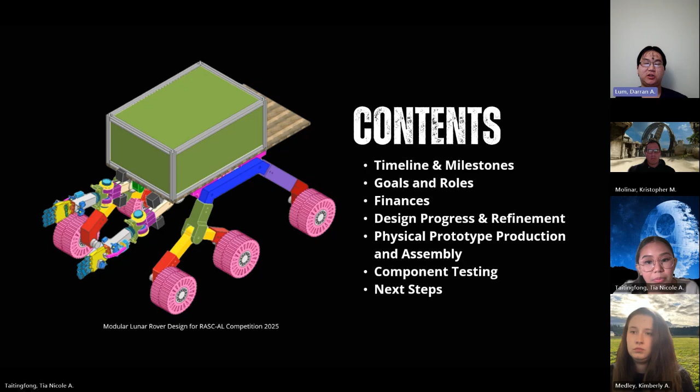For our timeline, we have a little bit of adjustment since we did not receive our EAB reviews by the first day of the semester. We were unable to refine the design between January 13 and 31. So the actual timeline shows that we started on January 15th, and it just pushed a few days until spring break, and then we maintained the same schedule throughout the second half of the semester as planned.

Our current milestones include starting the production of the prototype, which we have completed, submitting our RASC-AL proposal, doing our team check-in, and here we are at March 8th for review and feedback from the midterm report. Following that, we'll have 60%, 80%, and 100% completion between March 10 and April 8th.

For our goals, we'd like to design a collaborative and semi-autonomous lunar rover to maintain systems and resources on the moon. Additionally, we'd like to create a modular and scalable design that can be adapted throughout time with changing mission requirements. And if time allows, we'd like to implement machine learning to develop decision-making algorithms and enhance its autonomous capabilities.

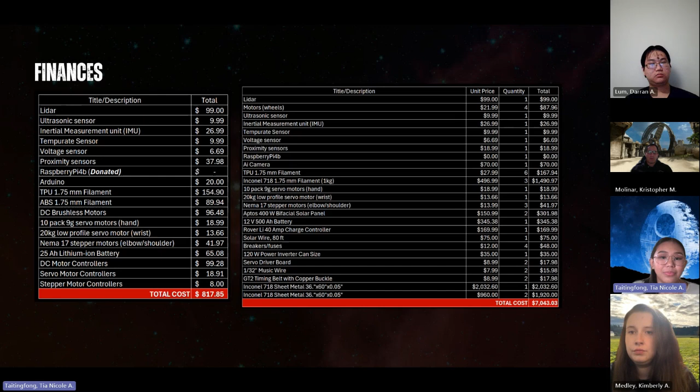For the design refinement, specifically for the arm, at the end of last semester in the fall, the arm design had separate brackets because the intent of the model was for how you would actually manufacture it, not for the prototype, but for if we were to actually make it. Whereas this semester in the spring, we updated the model to account for how it would actually be made if we 3D printed it. Instead of having a separate bracket that would be mounted to the arm, we could actually incorporate the bracket into the arm since we can 3D print more complex shapes.

Also, at the end of last semester, there wasn't a final design for how the arm would be mounted to the rover. We knew that we wanted to mount it to the rover, but the actual mounting point wasn't complete. So this semester we added a gear system that will allow it to rotate and act like a shoulder, moving the arm up and down, as well as elbow rotation, which will allow it to move left and right and rotate.

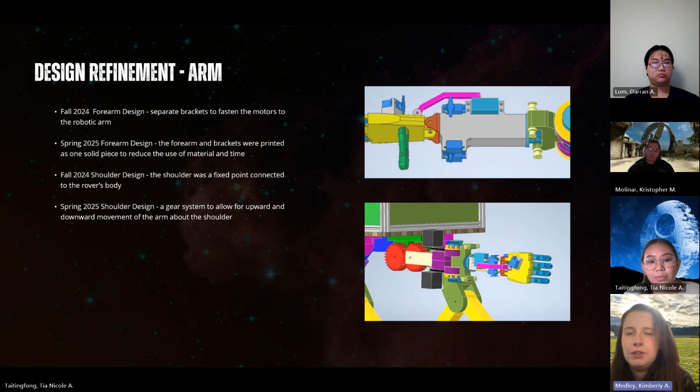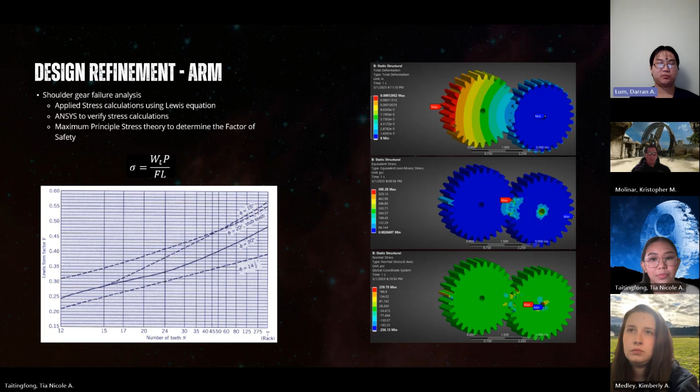For the design refinement for the suspension, at the end of last semester we had a pretty typical rocker bogie suspension with a differential gearbox. As we went into this semester, we realized that we needed a little bit more support from the suspension. So we modified the rocker bogie system and added more mounting points to increase the stability.

Also, at the end of last semester, the wheel connectors, the suspension was connected to the motor, and a lot of the force was acting on the pin of the motor. So this semester we modified the suspension mount to the wheels to incorporate a wheel bracket that adds a little bit of height and also lessens the pressure on the motor.

For the wheel connector failure analysis, we calculated the stress at 2 points that we thought would be the most critical points. One is at the base of the suspension bracket, and one is more in the middle. We verified that these two mounting points were higher stress areas through ANSYS, just to confirm that we were looking in the right spot.

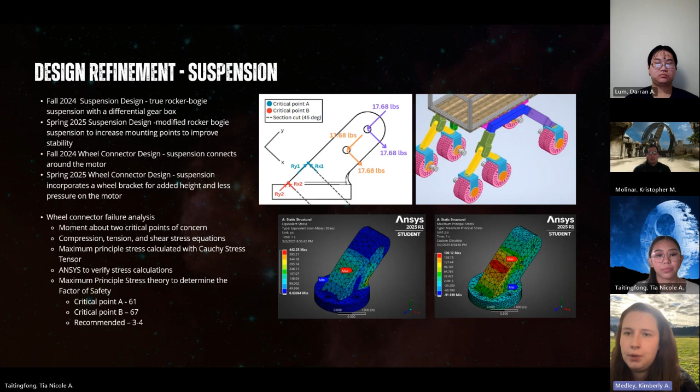Similar to the attachment of the arm to the rover, we had to rethink how we were going to attach the wheel. So as Kim said in the previous slide, we wanted to take pressure off of the motor itself and distribute it on the actual wheel.

So we decided on redesigning the wheel component to include a bearing within the wheel that would attach to the motor mounts. Those motor mounts would attach to the bracket, and then there would be a separate bracket, which is the green bracket on the top of the bottom right picture. And that would connect to the suspension.

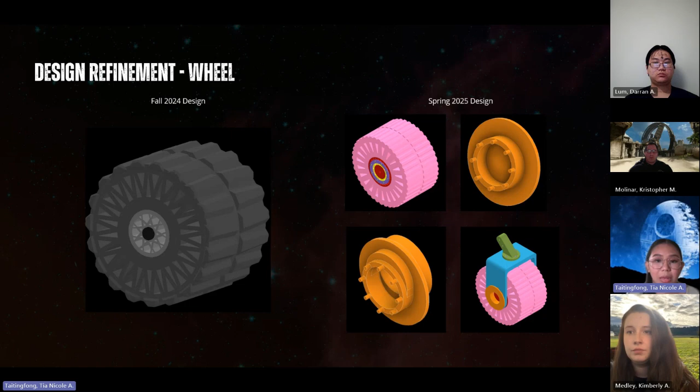This also allows the wheel to have a little bit more free turning capability, which is always nice. This design, although it's a lot more components, is a lot more realistic and it works a lot better than the previous design did.

So in our design progress for the photovoltaic system, just a recap of what we completed in the fall: we decided on using a standalone or off-grid PV system, with the ideal panels being multi-junction solar panels due to their radiation resistance, encased in space-grade glass. The actual design this PV system was based off of was a bifacial monocrystalline solar panel, just because those specifications are more easily accessible to the public.

The power will be stored in a 300 amp hour, 12-volt lithium ion battery due to its weight and its technology readiness. In the spring, we completed the wire sizing, and we need to complete the breaker sizing, which we should have done by the week after spring break.

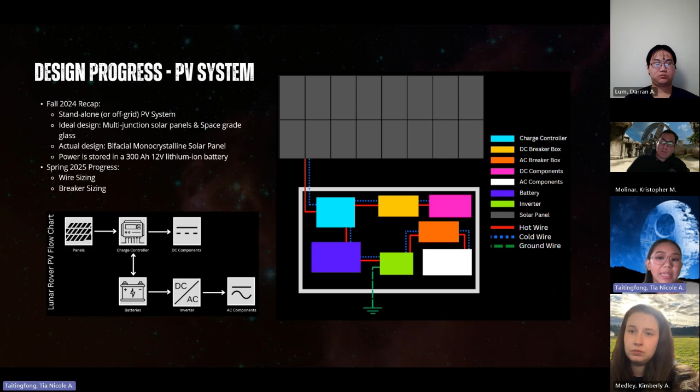For the wire from the panel to the charge controller, we've decided to just use the given leads from the panel, which is a 4-foot 12-gauge wire. From the charge controller to the battery is a 6-gauge wire or an 8-gauge cold temp wire. From the battery to the inverter, it's a 14-gauge wire or a 14-gauge cold temp wire. From the inverter to the DC breaker, we'll be using a 4-gauge wire, and from the inverter to the AC breaker, we'll use a 12-gauge wire.

So we're using a 12-volt battery system to power the entire rover, which supplies energy to all the significant components, including the motors, sensors, and control systems. The drive system runs on 4 brushless motors, each controlled by ESCs to handle the movement of the DC motors. For precise elbow and shoulder movement, we're using stepper motors controlled by a DRV8825 stepper driver.

This gives us accurate control for tasks like manipulating payloads or connecting umbilicals. A Freenove spider shield manages the servo motors that control the fingers and hands on the robotic arm, helping to handle the multiple servos efficiently.

On the sensing side, we've integrated several key sensors. We have an AI camera for vision tasks, LiDAR for obstacle detection and mapping, IMU for orientation and movement tracking, and ultrasonic sensors for short-range object detection.

For power distribution, we're using 12 to 8-gauge wire to handle the high currents required by the motors, and 22 to 24-gauge wire is used for the low power signal connections to keep things lightweight and manageable. Finally, we've included an external power supply just for the servo system to keep the power-hungry servos from overloading the Raspberry Pi and to maintain stable voltage during operations.

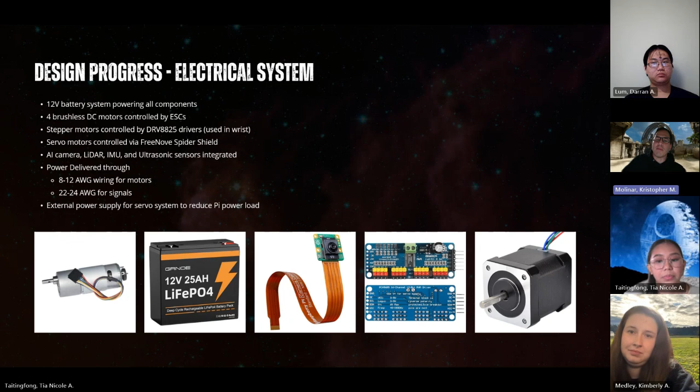The entire system is powered by a Raspberry Pi 4B running the Raspberry Pi OS along with ROS, Robot Operating System, which manages all communication between the hardware and software, allowing for modular and scalable control.

For motor control, we're using pulse width modulation to manage both speed and direction of the DC motors through the ESCs, giving us smooth and precise movement control.

For navigation, we're implementing SLAM, simultaneous localization and mapping, using sensor fusion. This means data from the LiDAR, IMU, and ultrasonic sensors are combined to accurately map the environment and allow the rover to navigate and avoid obstacles autonomously.

The AI camera is running TensorFlow Lite to perform real-time object recognition, which supports tasks like identifying objects, docking points, or hazards on the lunar surface.

The system is designed to operate in 3 distinct modes: autonomous, where the rover makes decisions on its own; remote, where a human operator can drive the rover directly; and collaborative, where it can work alongside astronauts, responding to their commands or assisting them with tasks.

Finally, we're using serial communications between the Raspberry Pi and an Arduino Mega to handle encoder feedback from the motors, allowing us to monitor wheel rotation and ensure precise movement and positioning.

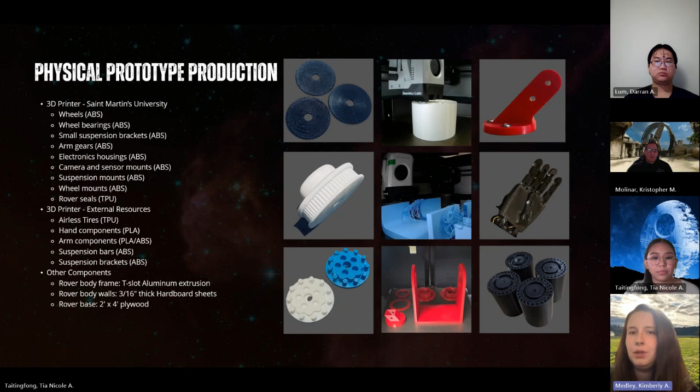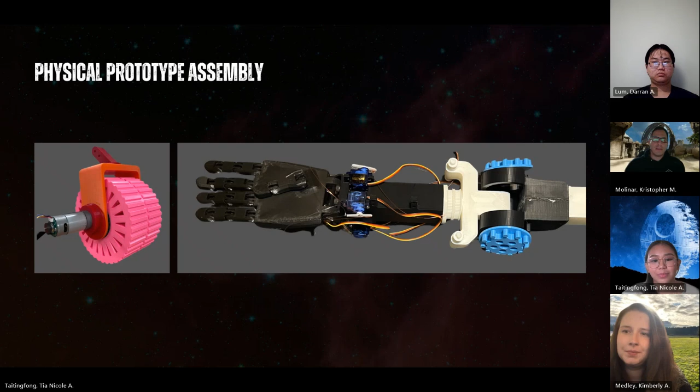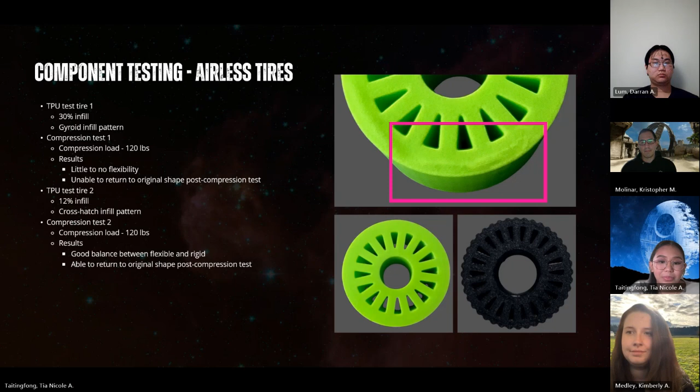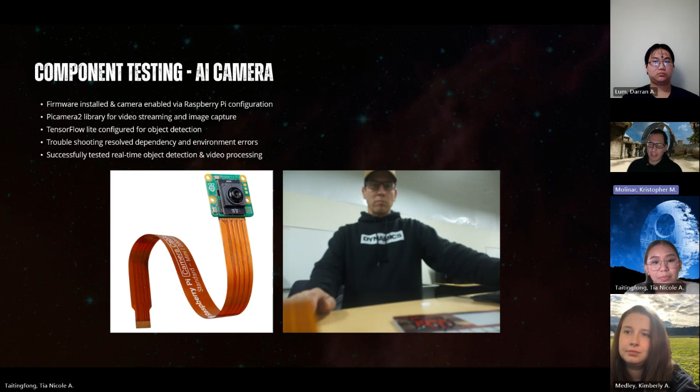So after all of this, our next steps for the remainder of the semester: of course we need to continue fabricating and assemble the final prototype once all the materials are printed. We'll also perform additional tests for the brushless motors, the object recognition and mapping, as well as the communication and control between the hand, arm, and vision system working together.

We are also going to begin working on the proposal for the IMECE submission, as well as brainstorm changes to the design based on whether or not we get selected into the RASC-AL competition by NASA. We're also going to be working with the size breakers and the wires coming out of the breaker box, and perform a test run once the rover has been fully assembled.